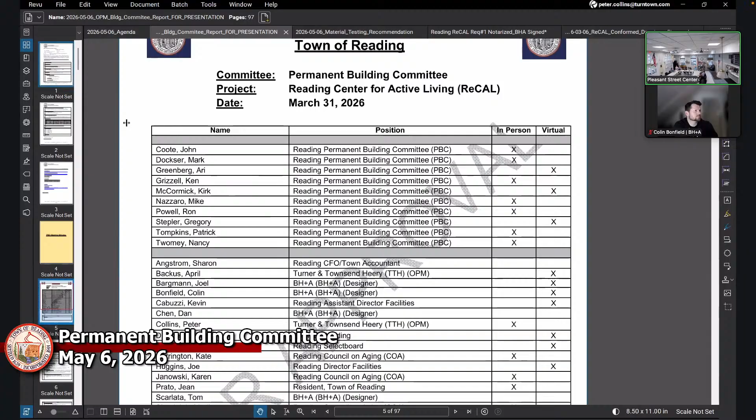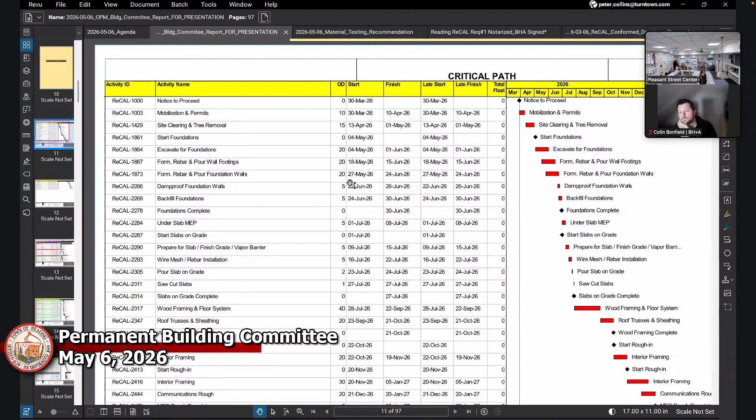All right, that motion passes, and yes. Oh Kirk, I'm sorry, Kirk, I didn't see you up there, Kirk McCormick. No problem, I am here and yes. Somebody's here, yes. Oh look, he said I'm yes, here. I am, no, I'm here.

Great, double duty, how come we can't get them?

All right, on to the next agenda item. Unless you want to take over, Pat, you can do it better than I can. I disagree with that, but I'm happy to take over. Go ahead, take over.

Hey, good evening everybody, thank you. Why are you sitting so far away from it? I have an extension cord plugged in. Okay, all right, I guess I always sit at this end of the table. It's kind of a forced habit.

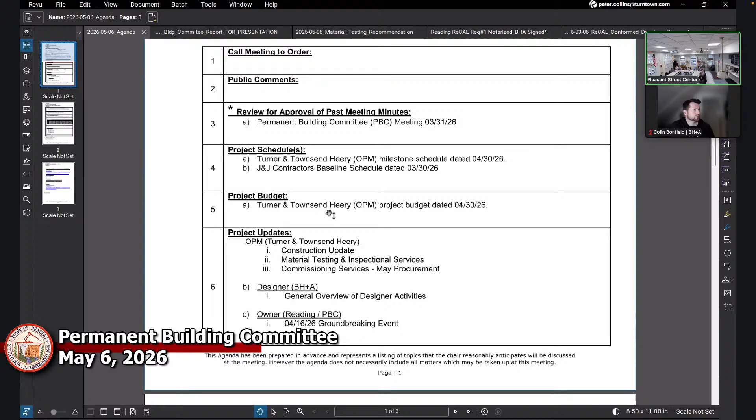Well anyways, thank you. Schedules - so we have two schedules to talk about or to share and present this evening. I'll share first off what we call the OPM's milestone schedule, which is kind of high level, gives you some high points. On the screen is just some points of information that we extracted, which I'm going to show. Next is the contractor schedule.

So right here you can see where we are right now today, May 5th - actually today's May 6th - concrete foundations, and I'll have April jump in when the time comes to give us some progress updates of actual activity at the project site as well. But in any case, they have mobilized the contractor this past month, and they're clearing and grubbing, and starting the foundations, as you can see here. And we see some structural steel and wood framing starting up in July, then the concrete slabs as well later on. So that's kind of a 30, 60, 90 day look ahead.

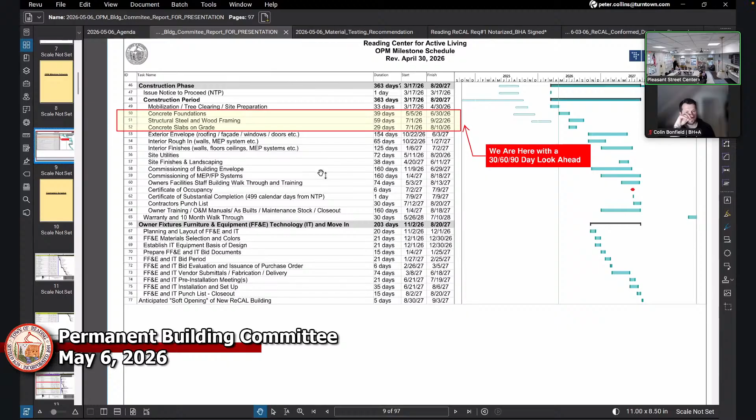Again, from the OPM's perspective on that, and of course we'll continue to update our schedule with highlight points. I'll move down the list here - here's the contractor's schedule, and we have two of them: a critical path schedule and a detailed map-out schedule.

I'll say, before I get too deep into it, this schedule sort of just came in recently. Currently the OPM, our office, and the designers BH+A are reviewing the schedule in concert with the contractor, and we're doing some red line comments. Once we agree to the overall format of the schedule in terms of the tasks, the durations, and the dates that are all within compliance with the contract...

...we will sort of say that's the baseline schedule and that's what we will work from. Should there be any claims or issues, we can go back and say, wait a minute, you told us it should be done here and so on. So we have yet to establish the baseline schedule, but we will determine that in the next couple of weeks and kind of lock that in.

And then on the monthly progress updates, we'll continue to make sure it's still within the baseline parameters. Again, we use that as a reference tool because if, by chance - which we hope there isn't - there is a claim for additional time, we can fall back to the baseline schedule and see how it was impacted based on the claim, and kind of validate if the claim for additional time is warranted or not. That's why we do it that way. Again, we're going to establish the baseline schedule in the next couple of weeks.

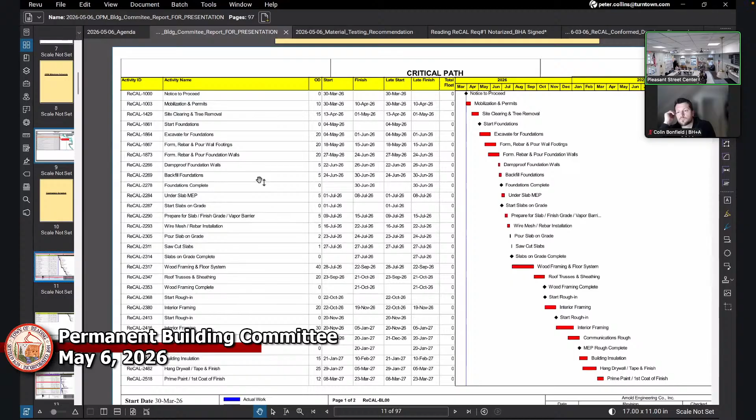Here is the critical path that was issued on screen. We're going to turn around and redline this a bit where needed, our office in concert with the architect's office. These are the critical path line items the contractor has laid out. Then we get into the detailed schedule, where they break it down by startup, utilities, structure, and so on.

So far their dates are pretty good, except we've got to check their notice to proceed. For example, they have 30 March listed, but it was actually 17 March, so we're going to correct that date. Then 499 days later is supposed to be the substantial completion date. Those are the things we want to lock in, measure, and go from there, without getting into an extensive discussion on the schedule.

So far it's in line with expected timelines. They've been mobilized for about 30 days now, maybe 5 or 6 weeks. By the time they got on site, established their bearings and grounding, and as you saw during the groundbreaking, they did some tree cutting, grubbing, clearing, and site prep. Now they're getting into excavation of the soils for the foundations and getting the fences up. I'll let April jump in on that.

Why doesn't April give you an update on the construction activities? So the temporary fence is up.

They have been moving a lot of loam out, and it looks like they are going to start digging for footings starting tomorrow. Through all of next week, Monday, the concrete contractor will be there to continue with the footings. Next week they are also going to tie into the main water line, and we should have temporary power there by the end of this week as well. That's kind of an umbrella view of activities for now. If there are any particular details, we can go over them.

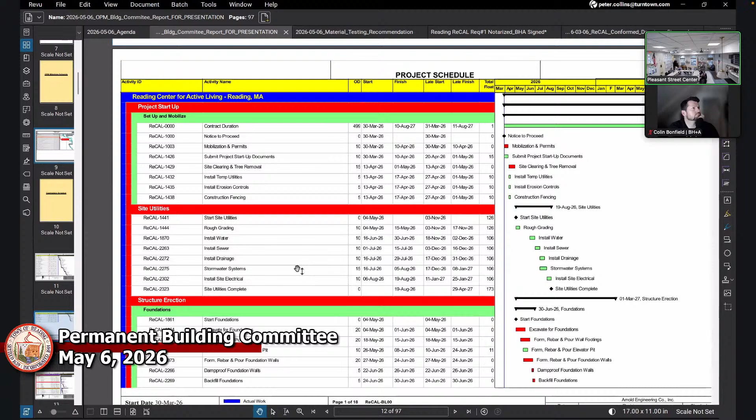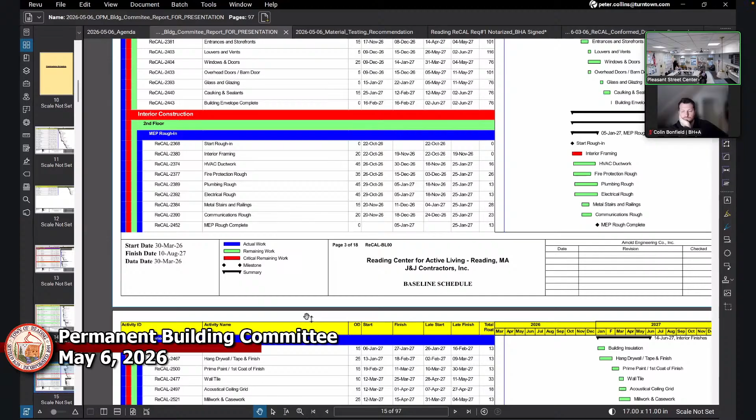I could find it, do you know anything? I believe in conversation with J&J they were going to try to get a lot of that done before snow flies. I'm not sure if that's changed on the schedule. I haven't gotten to that part of the schedule either, but my understanding is to have that stuff pretty much done this season, before the end of the calendar year, or when snow flies, winter conditions. I can confirm for you.

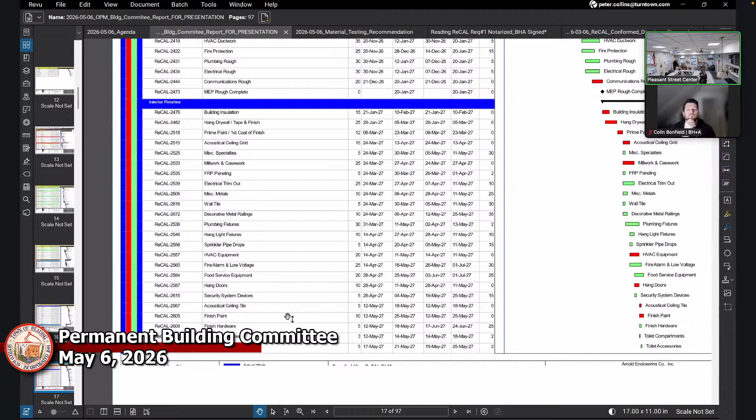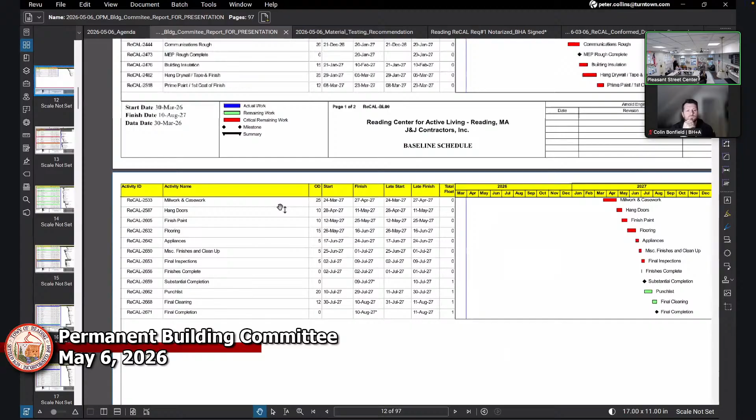Pickleball's moving right along, right? What's the time frame on pickleball? Everybody must know about pickleball. It's not on your agenda, but it's still scheduled. It should be open thinking by September. We're going to do a dedication in late October, I think. Want to give it some time, but there's a section of work that can't be started or completed until after July, that contract is about $300,000. It's not just the fencing. Site work's done, but a big portion has to wait until July, and then it takes a month for the courts to cure. It's probably better for them with a contractor next to them as opposed to a bunch of residents playing pickleball while they're trying to build out. That's what I was thinking.

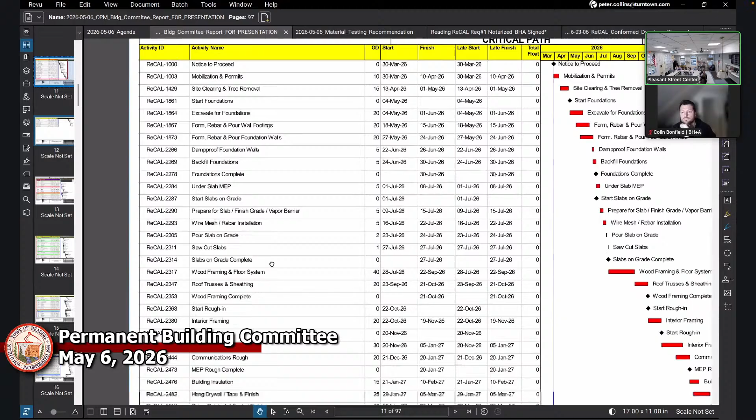Conservation's been out quite a few different times, as far as I know they're happy. Chuck is out there weekly, and he's fantastic, working with everybody. As far as I know he's happy with it, I haven't heard that he's not, so. Same with the building department, the building commissioner, and the fire department - everybody's had good communication, from town departments to the contractor, to April and the OPM and the design team, and right back the other way as well. So everything's in good spirits right now.

So there's a building permit or just a foundation permit been issued so far? Just the foundation. Just a foundation permit.

Is the geotechnical engineer on site? Friday morning. This Friday? Yep, I'll meet him this Friday. So they're gonna start digging foundations tomorrow - we'll be able to look at the bottom of the footing.

They're probably gonna start foundations Monday. We should get our things in order in terms of the schedule. We don't have a conventional system of foundations, slab on grade - slab on grade is no longer an accepted term by ACI. They're called ground support slab standards, and the ground support slab is the foundation.

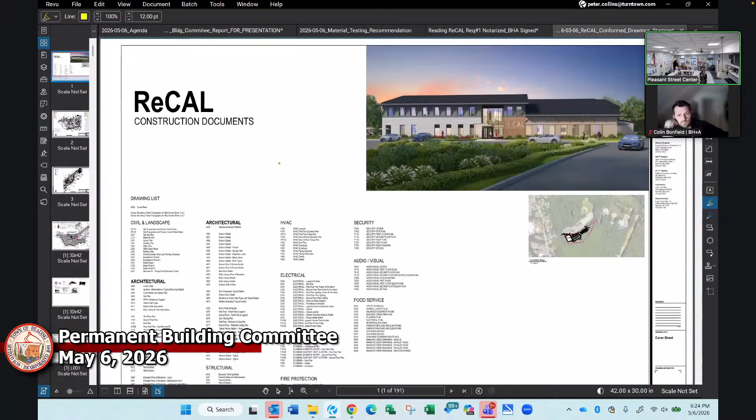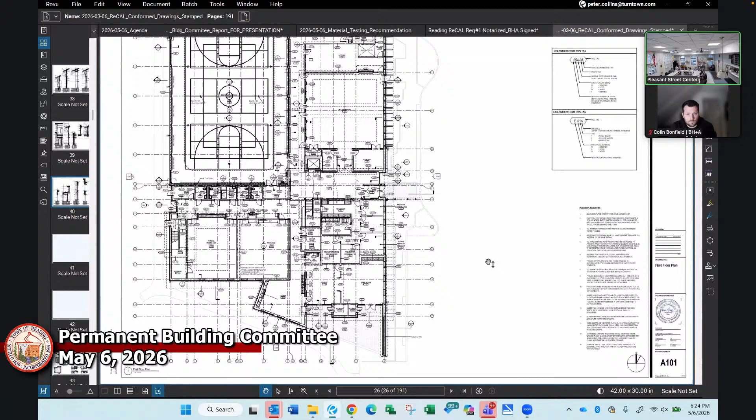If you can bring up anything on the foundation drawings or the first floor slab drawings - Jenna, is that possible? I think I can do that, John. Give me 30 seconds - structural first floor, whatever. I had this ready to go in case somebody had a question. I lucked out. This is architectural - you want the structure? Yes, structure.

That is a foundation - no, section 10, that's a foundation for a structural wall, and it is simply a thickening of the floor slab. A haunch slab, on slab. Correct. So it's not separate - the ground floor slab is not a separate item from the foundation, the two are integral.

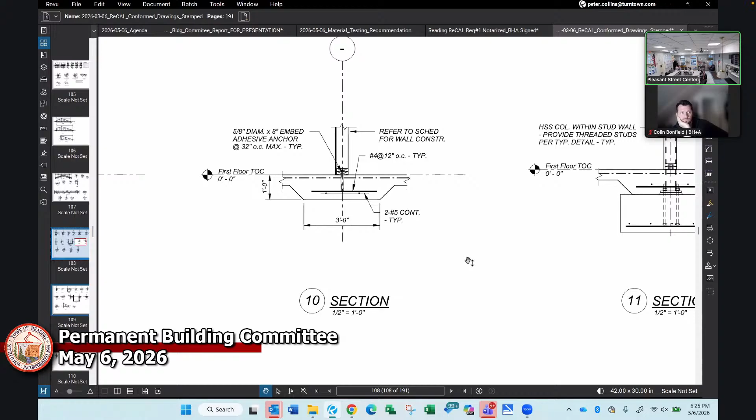Okay, which raises another issue for me, which I can raise now or later, it doesn't matter - it's about saw cutting those slabs. Maybe we'll wait until we talk about the control joints. I'm talking about control joints - there is no item in your submittals for submitting shop drawings for control joints. Since this is not a conventional slab, typical 5-inch thick slab which does nothing more than keep people's feet off the dirt - this is a structural slab.

It needs the location of the control joints to be very carefully coordinated with the structural engineer. I agree, there needs to be a control joint layout and location plan submitted for review and approval - that's not included in your submittal list. It is. Okay, yeah, but I know we'll talk about that when the time comes - thank you for that reminder, but yes, because this is a different building from the normal building in this location.

So their approach is they're probably going to start the foundations at the gym. Yep, work their way across.

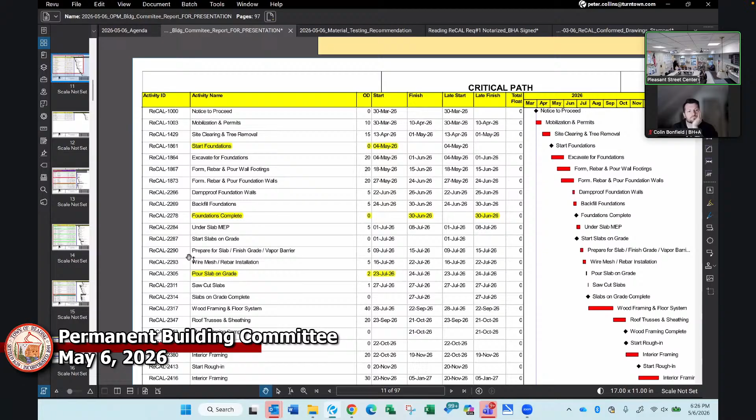They start slab on grade on July 1st in the gym. Meanwhile, simultaneously, they're working slab on grade in the community center, the conventional wood frame, and then slab on grade finishes, which is at the end of July. 27 July, 28 July, when wood framing starts, and the slab on grade in the gym continues on past that. So they're sequencing it.

I highlighted some of those topics there, the start activity and then some of the start dates.

So that's kind of the schedule, and we're still redlining it, if you will, and we'll get it tuned up and get the baseline established. So from there, we can certainly come back to more schedule questions if you want.

Overall, without spending a ton of time, it's a fairly well detailed and reasonably well thought out schedule. We thought so as well at first glance. Agreed.

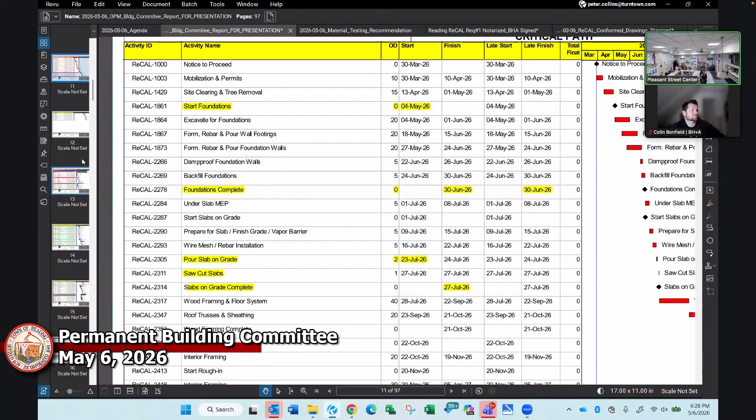I guess if you want me, I'll keep going. That's okay, I'll turn down to the next item, which is the budget. Let me just scroll down one second.

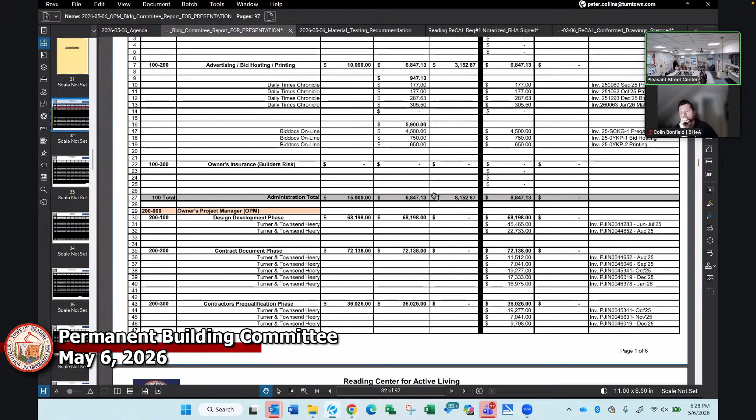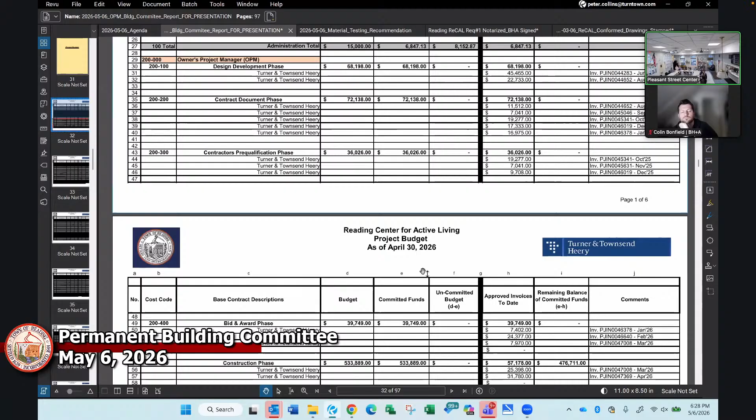So the budget, same format as you've seen. I have some updates and I highlighted in yellow, and I'll just show you what they are. It's basically updated to include the invoices that are being submitted, along with some change orders for the elevator that we have for the contractor, and an amendment to the designer's contract for the geotechnical services, which I'll show, and which we'll also get to in the agenda.

So here's the agenda, the budget. Dun-dun-dun.

What happened to my highlights? Okay, anyways, I'll just, let me do this. Something happened to my highlights, they're not highlighted anymore. Let me highlight it here right now. Sorry about that.

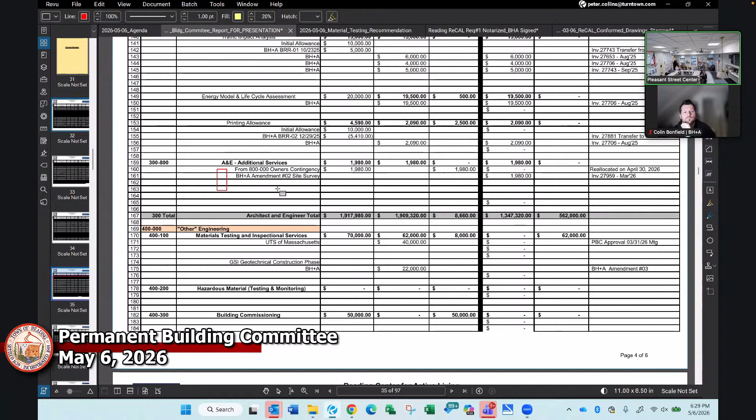Here's one of the amendments that— no, that's not it. I'm sorry, it's down here. It's small font, sorry about that.

This is the geotechnical services, which we'll talk about later, added to the budget, which shows some cost services that's under the design team for the GSI company to do the geotechnical on-site construction administration, which April mentioned will be there on Friday to start and look at the bottom of the soils conditions.

Just as a clarification, that is not related to the UTS materials testing and inspections. Two different entities doing two different services. And we can talk about that also if there's any clarification.

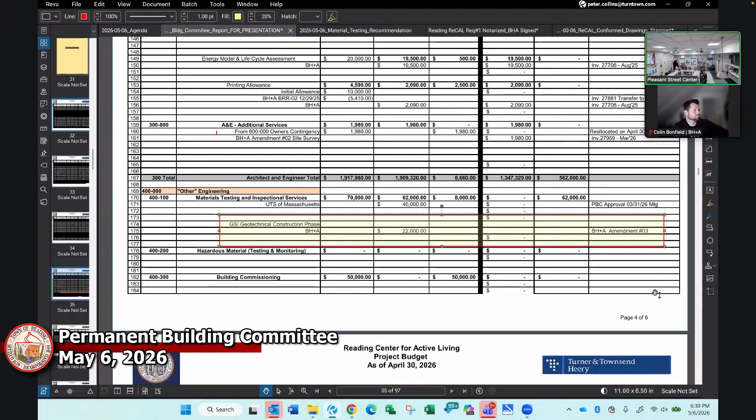So there's that there. I also put into the budget here, I added in— let me just do the construction contract stuff here. I'll highlight that. So there's the J&J requisition that's being submitted.

There's a change order for $76,997.13, which is the added cost for the Delta Beckwith elevator bid that we discussed previously. And you can see here, down here, under category 500, 200, as you look at this later, I took that additional money, the 76,000, out of the construction contingency, just as a tracking method, as opposed to the owner's contingency.

So I consider it construction related. So all the math is there. If you guys see this later on, when I send the final report in, if you see something that looks mysterious, let me know. But I think it's all there. My fingers are crossed, but certainly open to comment.

Peter, did you send this in the package to us, or is this recent? I did, just before—I think it was Friday or Saturday—but this has been updated a little bit since then, just some edits.

Yeah, it's not in my package. Yeah, I think I didn't include the change order on it. I realized we also had a little document adjustment with the change order between ourselves, J&J, BH plus A. So it's a placeholder for the change order.

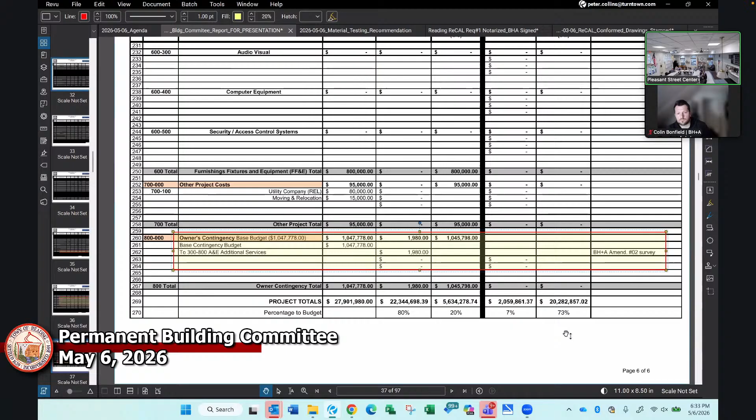But everything's still intact. Here's the bottom line of the numbers on row 270. The overall budget: 80% has been committed, 20% uncommitted, 7% with all the invoices as of tonight being approved, 73% remaining. That's the budget.

Peter, with the changes you're making, are you going to create an end note system also, so that, for example, the one you moved up to 300-800, there'll be an end note at the bottom saying owner's contingency increased by this amount, the note you have sitting right there, as an end note at the end, because that's going to disappear, right? Nope, that'll stay there. I'm going to keep them all so it's in place.

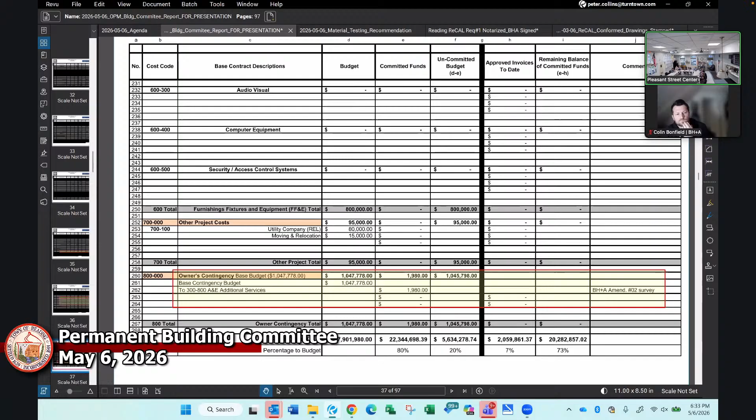As an example, I'll go back up to 300-800. You can see right here, it stays in line, just so it goes up and down, so to speak. That's the way my brain works sometimes.

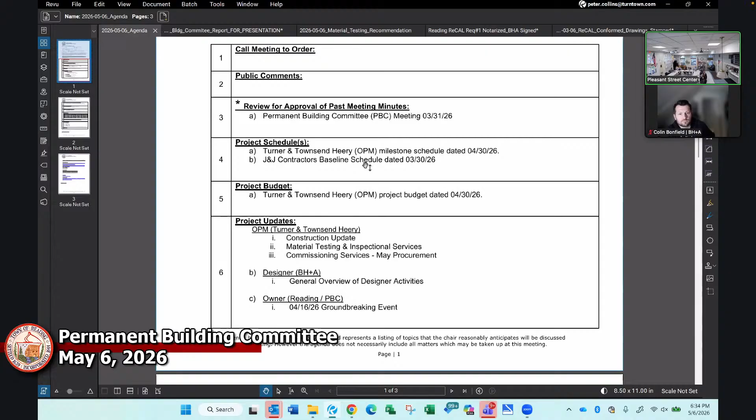So, okay, sorry about that. That's the budget, that's the schedule. We can now move on if you'd like. If there's any questions on those two items, we can always fall back to them again.

If you don't mind, we'll jump into some project updates. I'll turn it over to April again, if there's any other construction updates you spoke about earlier.

No, the fence is all in, the job trailers are there, we'll have temp power hopefully by the end of this week, and moving loam right now is really what it is. It's a lot of trucking right now. We'll know more when the geotech is there Friday.

But generally speaking, material out there looks good. Do you know if they intend to use the on-site material? We use it on site for various purposes, maybe structural fill. So the hope was to maybe do that, but we have to check with the geotech and make sure it's up to snuff to be able to do that. So if they can, they will, but if not, then they won't.

A couple of those soil samples have been sent to the laboratory for Proctor and Sieve analysis. So UTS is doing that so the geotech engineer can evaluate and make a determination. It looked like there was a lot of good material, some other things too. Fingers crossed, won't be any issues.

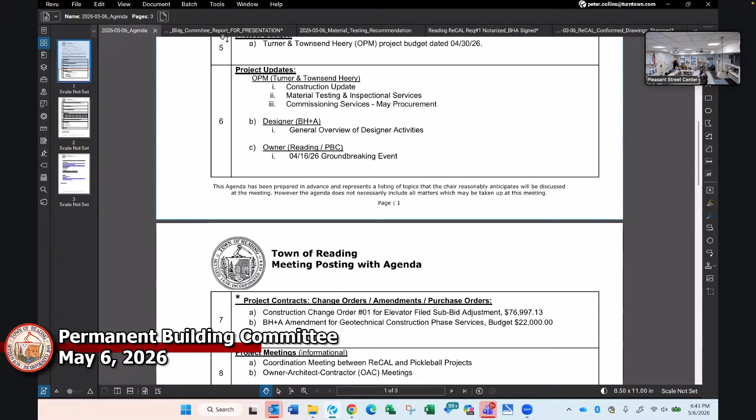Moving on to the next agenda items. Anyone want to tell me about the groundbreaking event that I missed? I missed it too, it was beautiful. Wonderful, yeah, the hot dogs were great. I heard something about hot dogs. You know Jane, that's just a good hot dog. Really? Jane did a great job. That might as well be her. Thank you Nancy, excellent. It was a nice groundbreaking. I think Turner and Townsend deserve credit for the provision of beverages. Only appropriate beverages on town property first thing in the morning.

It started out dreary, but it turned out all right for us because it wouldn't dare rain on us. J&J had everything set up so nicely on site. Facilities department, DPW gave us the sound equipment, and facilities set up chairs, carpet, podium, and we had power, everything was great.

Worked out great. And Jane bought shovels. Oh yeah, thank you, I bought the shovels. We put out the spec for the contractor, but you bought the shovels? That invoice will come to you somewhere. I paid for the shovels, so you'll have to reimburse me.

What kind of shovels did you get? I got 8 shovels for $240, altogether, not each. Were they engraved? They were not, I didn't do any of that. I'm gonna reuse them because I'm thrifty like that. But they are Ace Hardware shovels, red and black. I felt it worked. Oh, perfect.

No, they're gonna... no, I would never do that. No, we'll get them to the Mattera Cabin for the community garden, or DPW, something like that. We can repurpose them, they're $29.99 shovels or something like that.

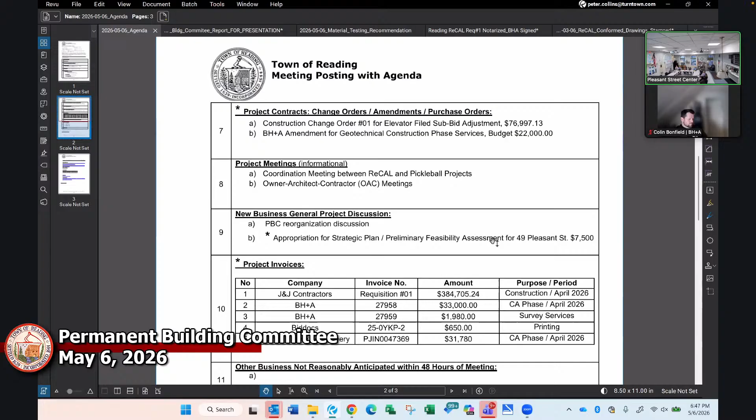Where is it relative to the site? You're on the street staring at the site, the building on the right, it's on the right hand side, kind of behind where the parking lot is, back behind the building, by the water, like in the little bed area.

It kind of goes down there. When they do the path, they're in there doing the path, they could pull it out and make it a nice planter, I don't know, artwork on top of it. Sounds good.

You have to be careful because there's probably soil contamination. Yeah, very possibly, although I'm sure that very responsible owner drained all of it, 100%.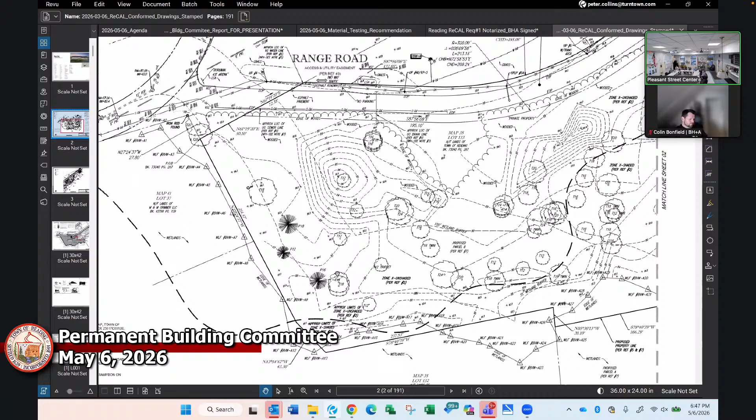So I understand local coordination with Burbank and the range, everything is going very well. Burbank has been great to work with, they're doing great, Ed Finuto does a great job. The contractors on site have no issues, everybody's talking and doing well. The groundbreaking was very cordial, everyone friendly and talking - the contractor, the architect, the owner's project manager, the client.

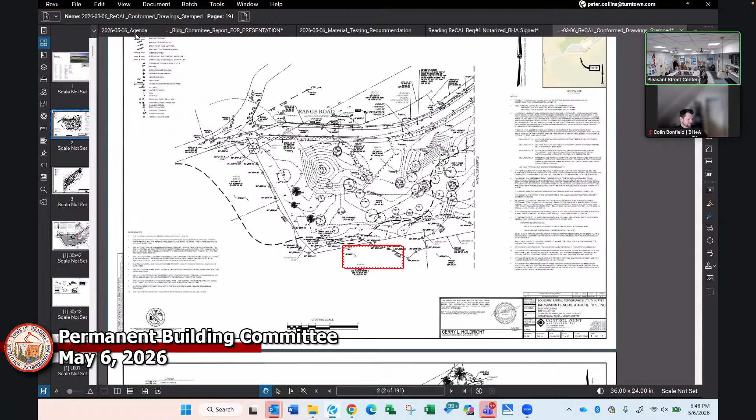So when we get to the ribbon cutting, if we're all just as chummy as we were on the 16th, then we have succeeded. That's our goal - to be just as cordial and chummy, and after we get through change orders and anything else we come across between here and there, then it's a successful project. Agreed. Well stated, and I'm sure we will.

Okay, so anything else on the groundbreaking? Good, you can move on to item 7. Okay, great. So item 7, project amendments and change orders to the project.

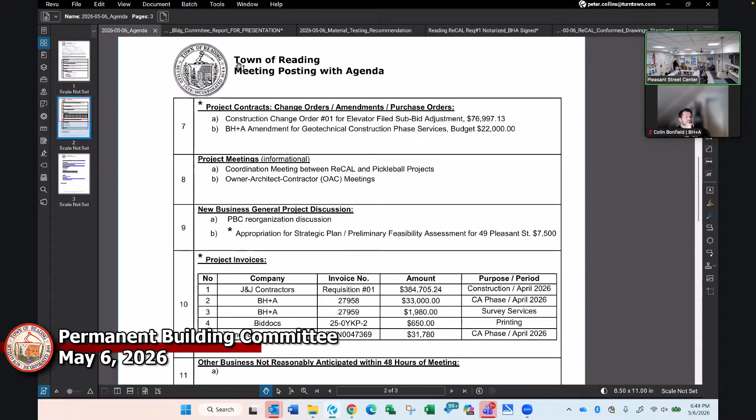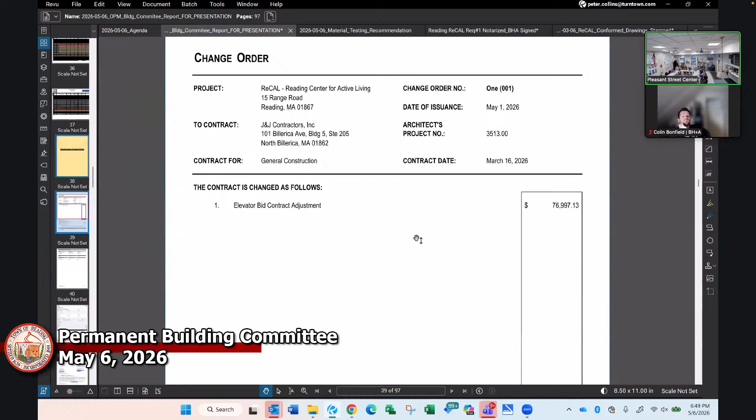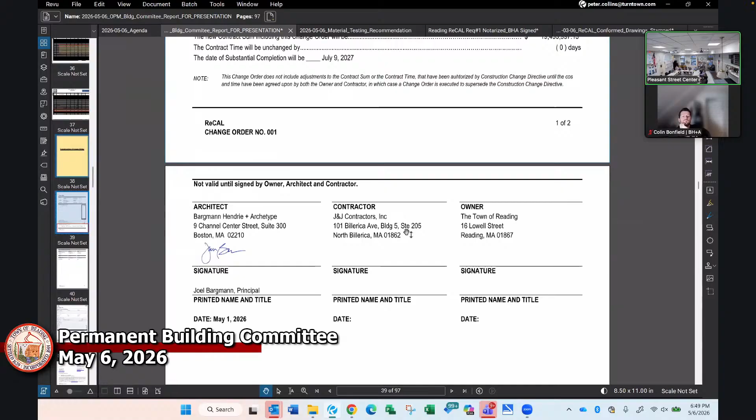I will turn my other screen to where they are. Again, these will be in the report. So the construction change order number one is the J&J for the added cost for the elevator bid adjustment, which we're all aware of. Here's the actual change order cover sheet, signed by the designer. We got the signature underway with the contractor, then when everything's good and approved, we'll get it on to the owner for signature. And there's all the backup to it.

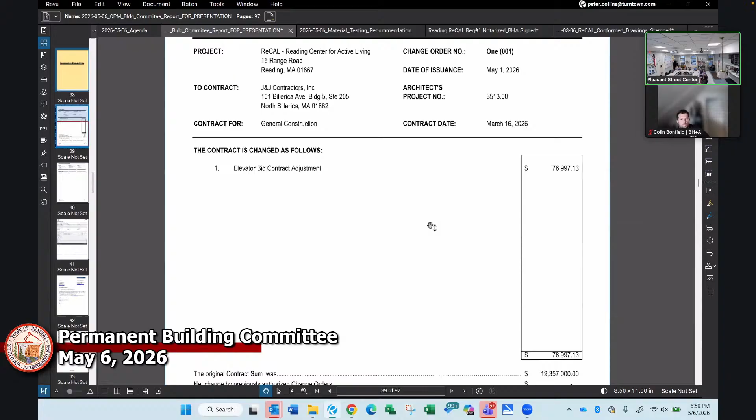The letter we wrote - zoom in on that. The contractor's change order, yeah, you want to see that? Did I go back up? Yeah, I want to see the markup on it. There is no markup because we carried an allowance in there - it's not a markup, but we did have the bonding costs. Got it, I was wondering why that was an odd number. That makes sense, okay.

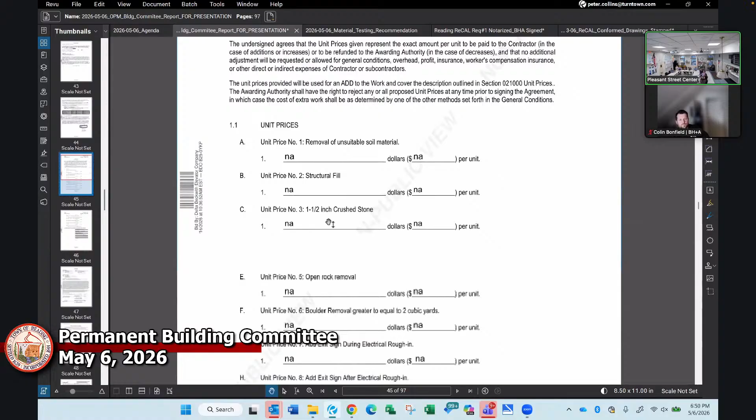So anyway, not to scroll through and make your eyes go crazy, but this is all the backup to this change order - here's the unit pricing and so on, signatures and so on. Then we get on to the next one, which is the designer's amendment.

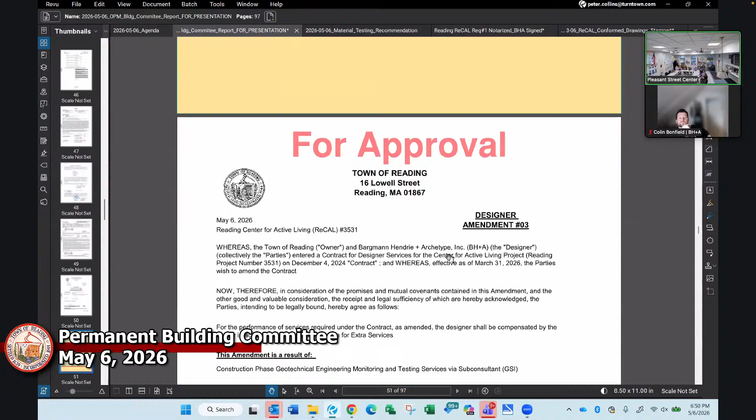We call them amendments for the designer or the OPM, and change orders for the contractor. So here's a draft sheet for approval - this is kind of a sheet we're working on with the procurement office, itemizing the amendments for the design team.

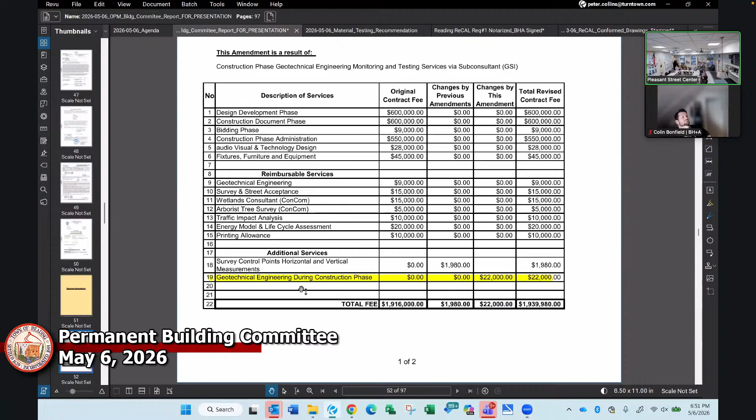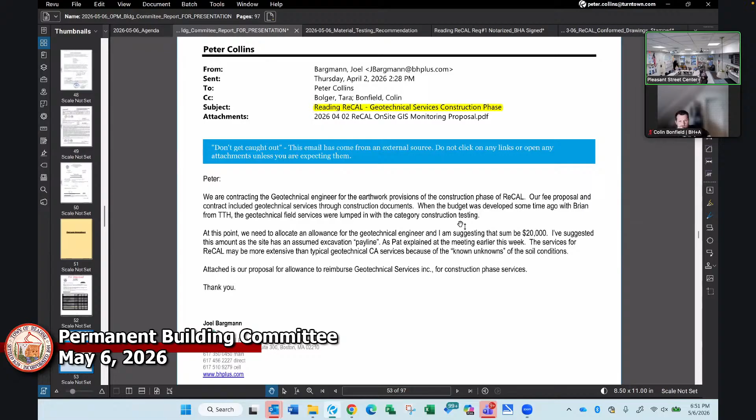I'll highlight this - right here, $22,000 set aside for a time-spent arrangement for the geotechnical services by GSI. GSI is the designer of record for the design team on the geotechnical services. This was an email from Joel from BH+A talking about that, and there's a proposal.

And it's within the budget - we had the $70,000 that we allocated. I can go back to the budget if you want, but I think I highlighted it earlier. Where did I put that? I put it under testing services - there it is. All of these have been reviewed by the financial working group and sent out.

So those are, back to the agenda - two contract adjustments for the project: one for the contractor, change order number one, $76,997.13. Then a contract amendment to the design team, BH+A, for geotechnical services during the construction phase on a time-spent delivery, budgeted amount of $22,000.

I think we need two separate motions to approve those. I'll welcome a motion. Move to amend the budget - this is correct - for the elevator bid adjustment in the amount of $76,997.13. Second. Any discussion?

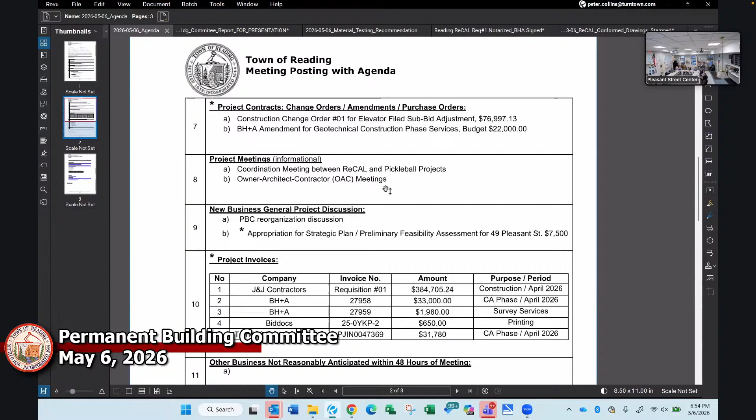Any other discussion? One question, I think I know the answer. When we had the previous geotechnical engineer on board before this one, remember? I thought it was always GSI, but maybe that was before my time. No, we had two geotechnical firms. Was it Wilcox and Barton? Yes, that sound familiar? Yes. Did they work directly through the town?

As opposed to BH+A? No, it's contracted to BH+A. Oh, they worked through them. I'm wondering what happened to money that may have been included, whether it was spent or withdrawn. I'll find out, that was the feasibility study phase.

But I'm wondering whether in their bid or budget, geotechnical services during construction was included. It's not in the current geotechnical company's budget, but was it in the previous one, and if so what happened to that money? We can look into it. I think it may have been budgeted at one point, but it wouldn't have been paid, since we would have paid for services done by the prior geotech. No, but it might be included in the architect's total budget.

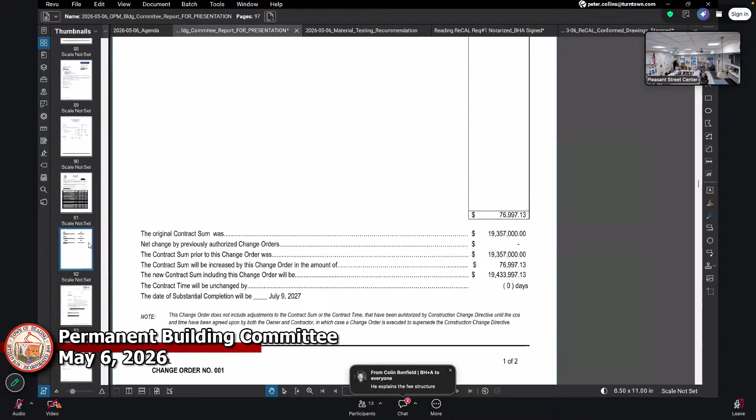Colin suggested that you read Joel's email. So we paid for that out of recreation, because part of that work was doing the pickleball assessment, and Activitas is the landscape architect of both projects. So recreation paid for that during the feasibility stage. Remember this? Yeah, during the feasibility. Wait a minute, Joel's email?

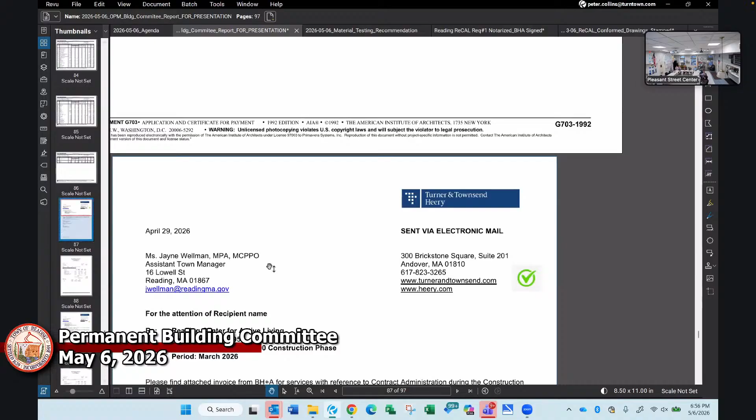I'm sorry, I gotta go, I'm way down on my screen. Is that what Colin suggested? Okay, here's Joel's email. Construction testing, that sounds right.

That makes sense to me. I don't know if that answers your question. Well, it makes sense in terms of, yes, I was just wondering whether the previous geotechnical engineer had money included in their contract for field services. I think they probably did not, but I think I know the answer. They may have provided a proposal but never acted on it. Based on what Joel's saying there, field services were always separated.

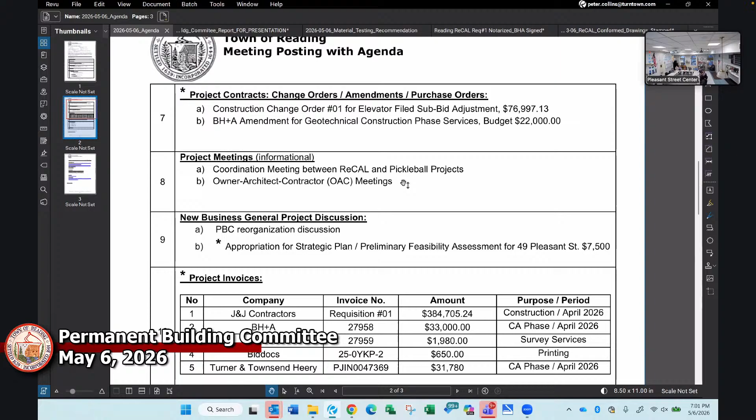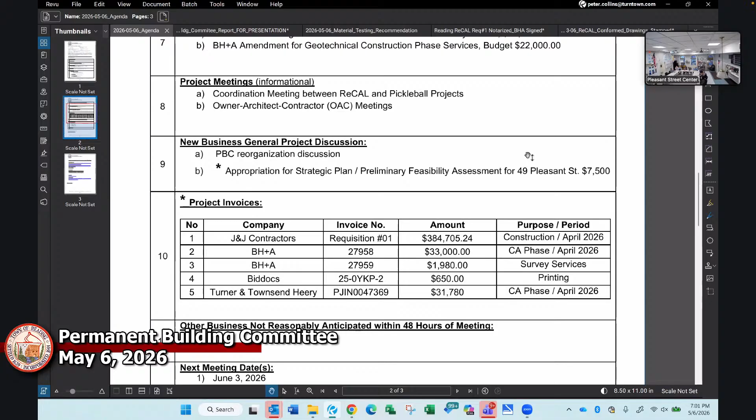Anyone else? Any comments or questions? We move on to item 9.

One item I put on the agenda for a quick discussion that members of the PBC can take under advisement, give some thought to: we reorganize every year. I think we did it last year in August, so I was kind of loosely planning to reorganize in August of this year. Just to give everyone a heads up, to give some thought to if anyone wants to take a position or reorganize the committee.

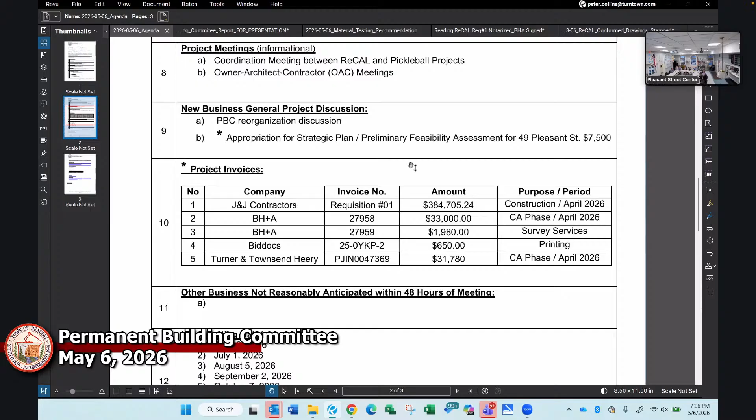That's great to ask now, because right now the applications are open for committee changes. That's really all you have to do - communicate to the town manager's office, and these applications are going to get you those. Then it goes through the volunteer appointment subcommittee and select board - it's a bit of an odd duck in that there's still the appointment committee, which consists of the select board, school committee and the moderator. But I'm sure there's a mechanism we can apply if someone says I want to apply to be this.

So, right, just a quick food for thought, a heads up a few months ahead, let people think about it. And one way or the other, in my mind, come this summer, we need to find someone who will be the chair, either then or in a year.

So think about that.

Okay, moving on, unless anyone else has comments or questions, let's move to 9B: the appropriation for strategic planning, preliminary feasibility assessment for Pleasant Street. Jane, you want to bring us up to speed on that?

Yeah, so this is a request to use the budget from the permanent building committee to fund this study. We've engaged Strategy 5 to do an assessment, which includes several tasks: preliminary research, site and building reconnaissance, and market dynamics discussion. That's a general market assessment looking at various sectors with potential within the adaptive reuse scenario, including but not limited to cultural arts, food and beverage, specialty retail, office, residential, entertainment, and general commercial.

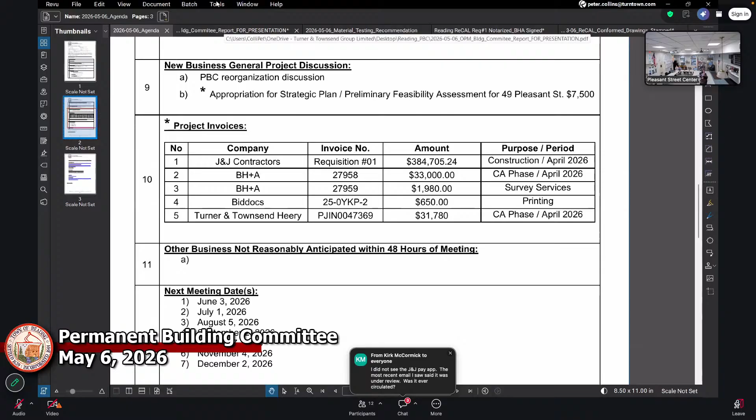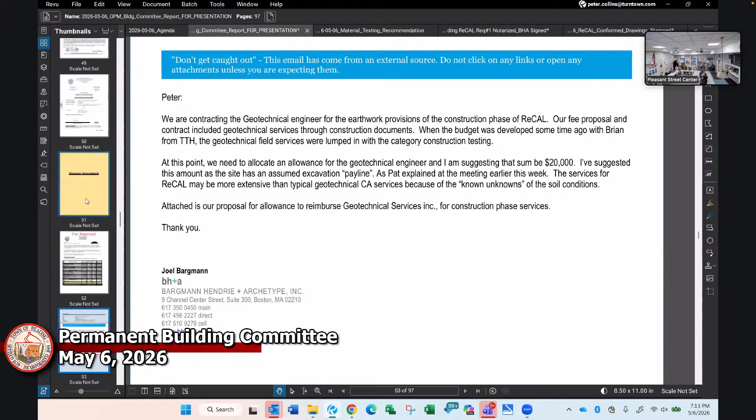Moving on to item 10, the project invoices. Quick question, Peter - the J&J invoice says under review, and I don't think it was included, or did I miss it? It was not included at the time because we had just gotten it, and we cleaned it up last night and today. I have it here, it will be included. I think that was the first thing you went over, you were just a little bit late - not the invoice. Oh, project invoices, here we go.

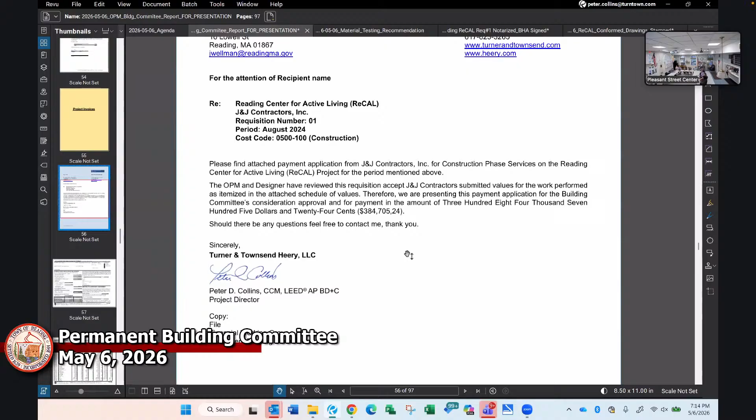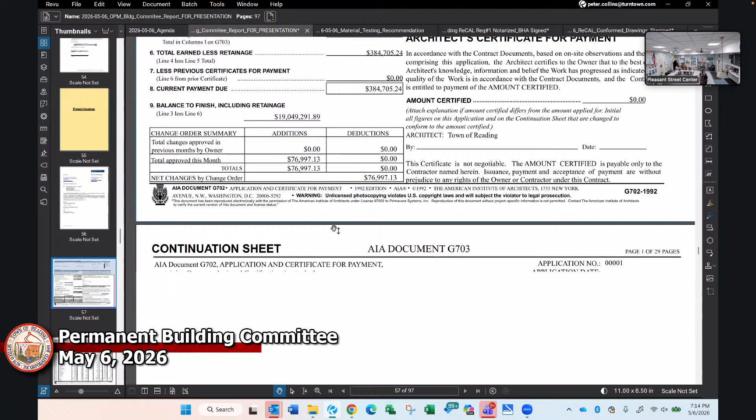We did ourselves, the OPM and the architect, we went through the J&J contractor schedule of values. We are still finalizing any adjustments to the overall schedule of values, because they want to make sure that's in balance with the overall project. However, they have been there for a month, and we did go through what they're seeking for early general conditions costs. It's $404,000 gross minus the 5% retainage, nets out at $384.

I can highlight it right here, it's also on the thing. Right there. It's predominantly the superintendent, project managers, safety officers, getting some general conditions up and running. And then some bond cost as well. So we looked at this, and that's pretty much it.

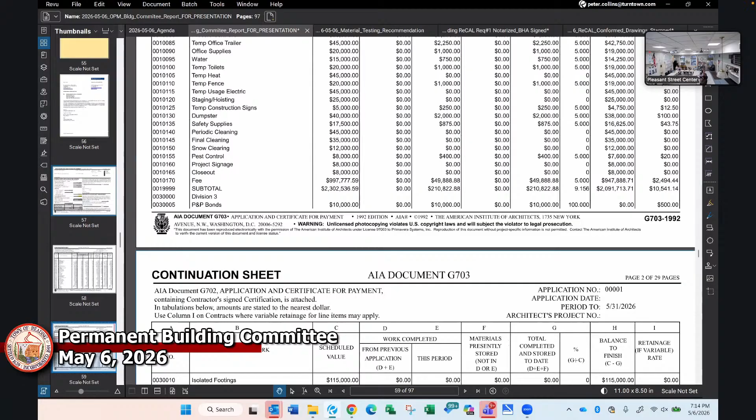Can we just zoom in on that first page of detail? Sure, let me zoom in and move it around a little bit. Let me do this so you can see the column - it's this column right here.

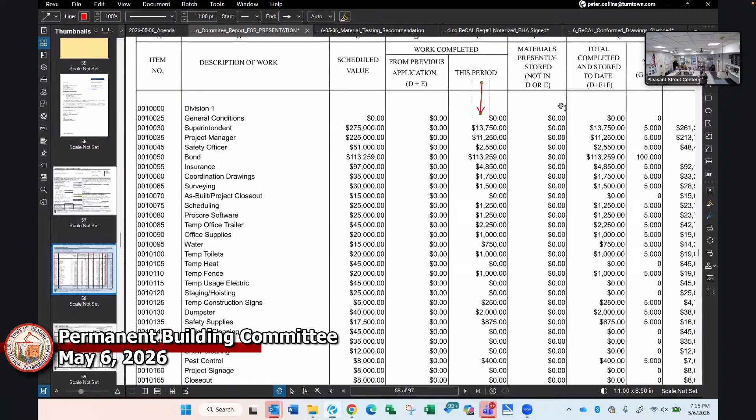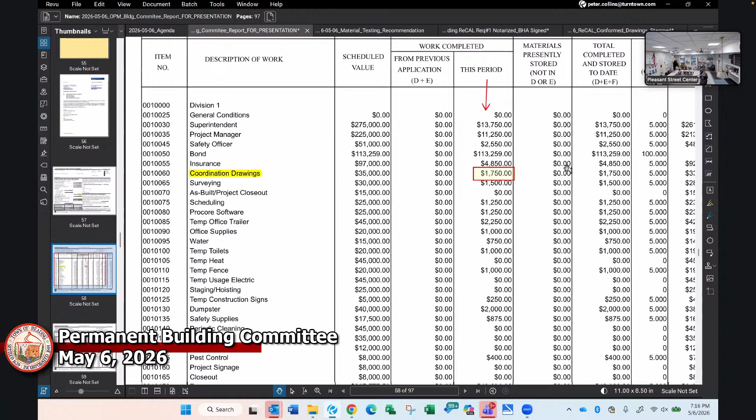Puts it at 5% completion. Everything looks really good to me. We thought the same. We are going to be reviewing the schedule of values again for completeness, make sure all the proper bid numbers are in there, and that they're in balance with the progress of the work - properly loaded, not front-loaded, so to speak. We'll have that cleaned up by this time next month.

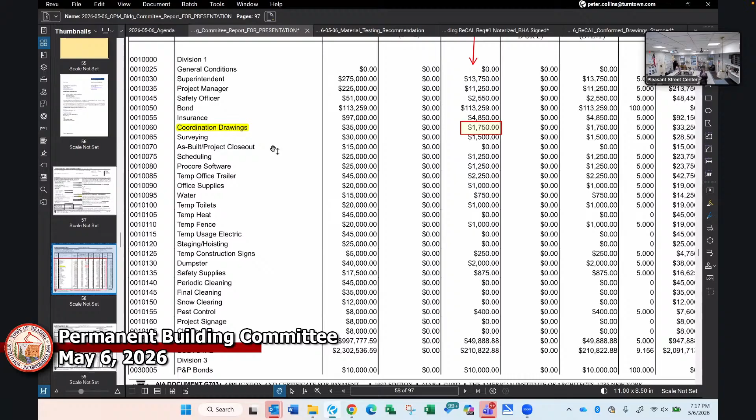Similar to the baseline schedule, this just came together in the last 5 days, with some edits yesterday and this morning. So I apologize for the lateness, but we found it to be reasonable for the first month - 380,000, about 2% of their fee overall. Thought it was fair. State contractor - what is his part of that?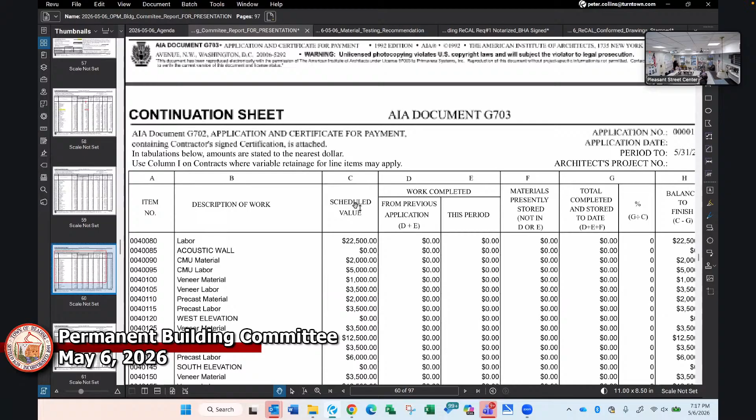Where did he go? I don't think he was - so J&J is self-performing the site. Oh, that's what it was. Yep, that's right, that's right. How is the fee calculated?

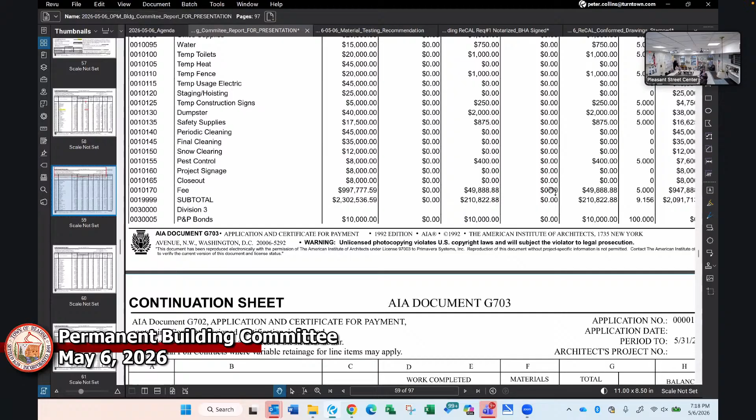You've got a large number of strange numbers there. Oh sorry, I went too far. This number right here, John? $49,888.88. Must be a percentage of something, right? It's at 5%, it's 5%. Okay, 5%, so it goes up for 5%.

You see, we can track the fee against the fee. Yeah, correct - it helps people understand.

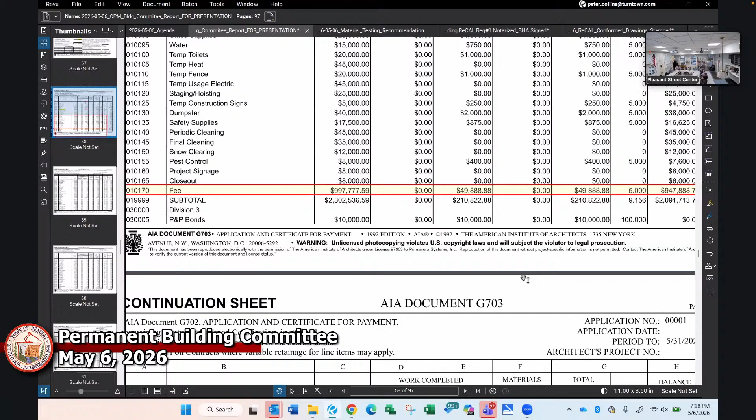So in any case, that's what we came up with thus far, so I'll go back to the agenda. We are in concert with the design team, BH+A, recommending for approval the J&J contractor's first requisition for the period of April, $384,705. I'll keep going for further recommendations - the BH+A normal monthly invoice for the architect and consultants, $33,000 for the contract administration phase for the period of April. And then last month, $1,980 for the site survey services billing.

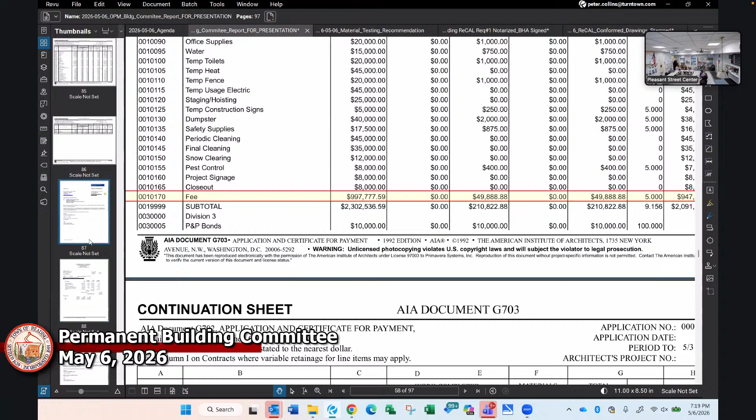We also saw that, make a recommendation. Then bid docs did some printing of some documents, $650. I have all the backup here if you need to look at it. I don't think the only one I did not include was the J&J invoice - I think all the other invoices were included in the original package. I'll just go back to the agenda to see the numbers.

I won't say anything about item 5, I'll let somebody else say something, which is the OPM's invoice. That's too much, I didn't ask.

I'll just say this, item 2 and item 5 are in sync with the cash flow that we've established for the balance of the project. So it'll be basically a monthly fee, in concert with the cash flow that we submitted to the finance office.

John Coop? Yes. Mark Doxer? Yes. Ken Griselle? Yes. Kirk McCormick? Yes. Ron Powell? Yes. Nancy Toomey? Yes. Pat Tompkins, yes. Motion passes.

Move to accept and pay the invoices from BH plus A numbered 27,958 and 27,959 in the total amount of $34,980 for construction phase April 2026 and survey services.

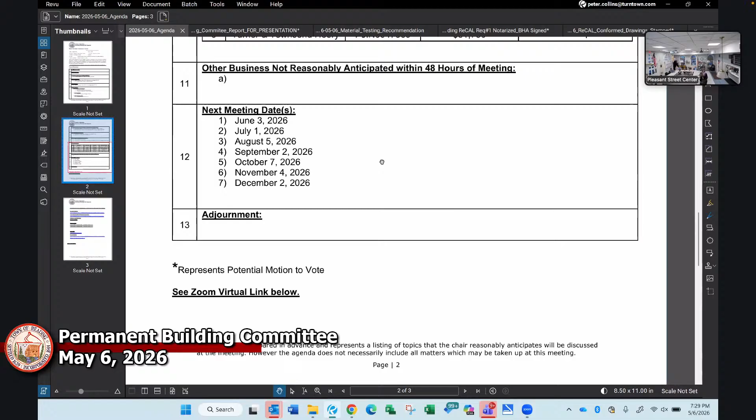Second, we will have an agenda item. So a couple of these things, I don't know—the heating system will be on, like the kitchen.

And some other use—Marilyn, did we respond adequately to the various suggestions we had about the movable partition in one of the rooms? Do you think we responded to that? Mark and Beverly explained where that stands.

It was discussed at the Council on Aging's last meeting. I did want to report that we discussed it at our last council meeting. By a vote of 7-0, the council voted to strongly recommend the partition for the reflection room. They asked that the building committee reconsider or look at other options.

We've also been talking to the town about other options, and we've had some good dialogue and discussion. They're looking at all options. Right, there's a lot of options being talked about, which is why it wasn't on the agenda. The expectation in my mind would be it ends up on the agenda. And windows in the gym?